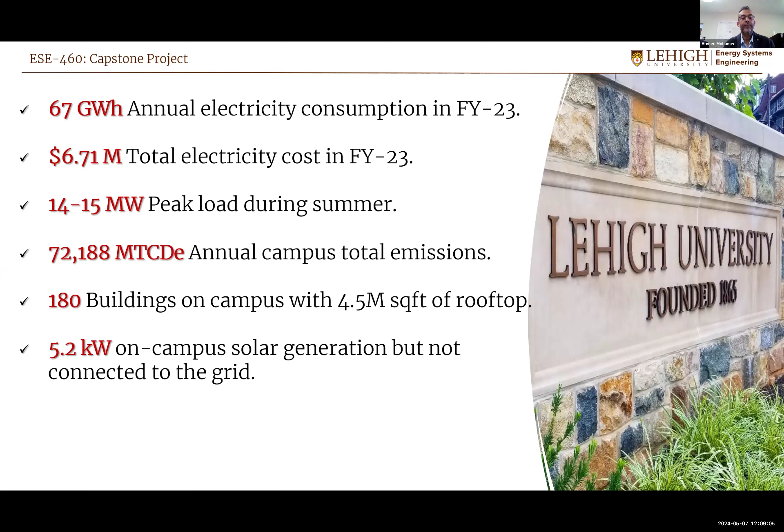The project objective is to assess the potential for the campus to provide grid services through aggregation of an intelligent virtual power plant, support the achievement of the financial, environmental, and operational targets, develop a detailed simulation for the integration of distributed energy resources, and present the findings derived from the exploration of the project.

Regarding the sustainability goals, the university has 13 goals for resilience and greenhouse gas emission. Our interest is in two goals. Goal number 11 is to offset 100% of the electricity consumption with renewable energy through a combination of off-site and on-site projects, energy conservation, and renewable energy credits.

Goal 12 is to seek additional renewable opportunities to offset natural gas usage as per climate strategy. Going into the potential, the university has a capacity to integrate distributed energy resources represented in rooftop solar and batteries to enhance its resiliency and reliability. This will lead to energy saving and, of course, greenhouse gas emission reduction by using these renewable resources. Ultimately, this will lead to financial impact through participation in the demand response program.

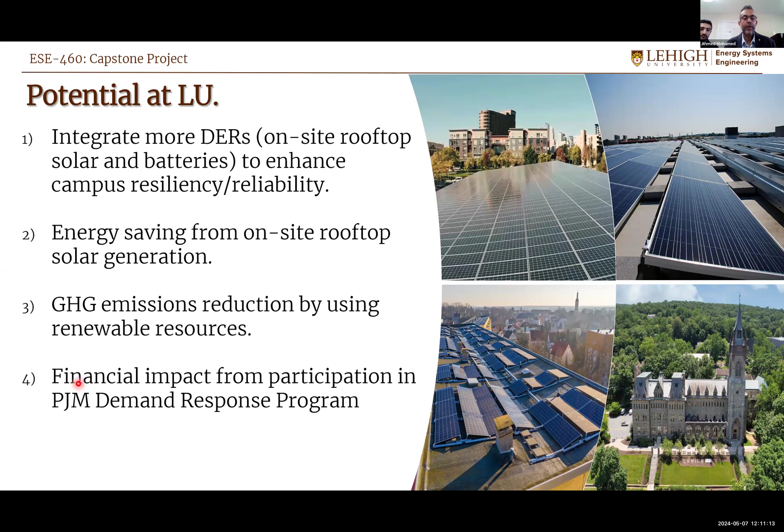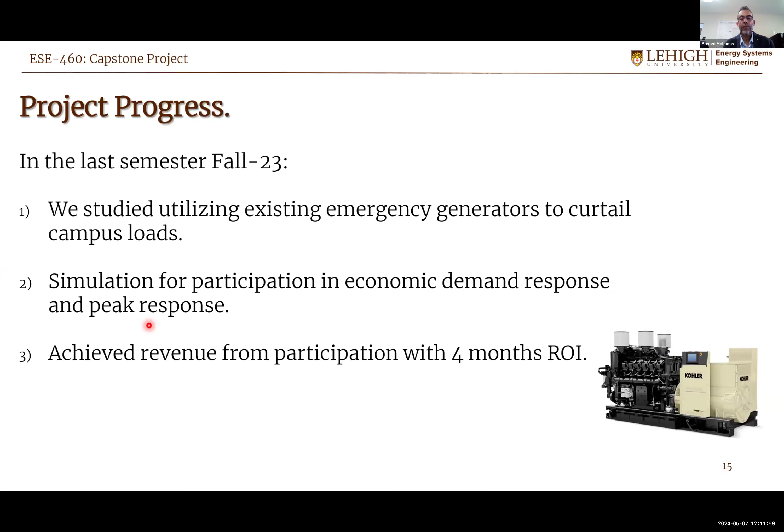Project progress. Last semester, fall 2023, we studied the existing emergency generators to curtail campus loads. We have done simulation for participation in the economic demand response program. We evaluated different tools of the demand response program, and we selected the most suitable tools for campus contribution, resulting in revenue with a 4-month return on investment.

In this semester, we have done background research based on the available assets at campus, as well as a review of the demand response program. Then we have done data collection and simulation through the load profiles for the buildings and analysis of the distributed energy resources via REopt and HelioScope, as well as developing a selection model through rating index metrics and the contribution from the DIRNet neural network model, which led to the simulation of the demand response program. Based on this, we made the assessment in terms of operational, financial, and environmental results.

A virtual power plant, in a brief definition, is an interconnected network of distributed energy resources, such as solar panels and batteries, managed centrally to optimize renewable energy utilization, grid stability, and participation in energy markets. As shown in the graph, the virtual power plant has inputs and outputs. Inputs come from different distributed energy resources, like batteries, solar panels, generators, demand response. The virtual power plant is like a brain to predict, optimize, and aggregate the best resource energy for selection, for evaluation, and to contribute in the demand response program.

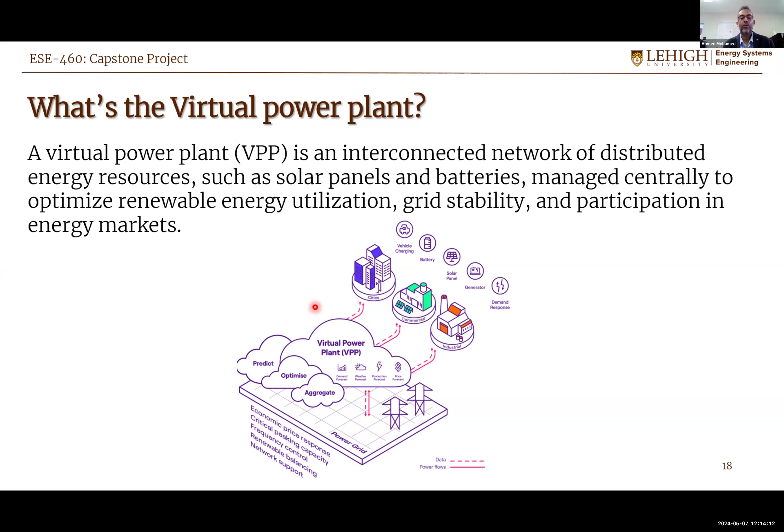Similar to our project, we have explored as part of our background research similar universities like the Queensland project and the University of California. University of Queensland has done a batteries project. The project rated power is 1.11 megawatt. The storage capacity of the batteries is 2.15 megawatt-hours. The total project cost was around 2 million and it was commissioned in 2019.

The project revenue for the first quarter was around $80,000. As shown here, the battery earns revenue by charging when energy prices are low and discharging when prices are high. The prices range from $11 up to $34. The battery is charged at low prices and then discharged to the grid when prices become high, around 34, which generates revenue for the campus.

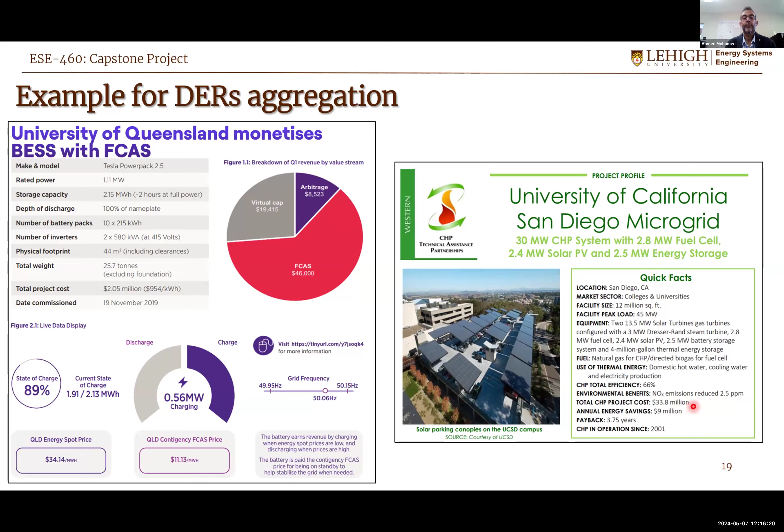Another example on the right-hand side is the University of California. California has implemented a 30 megawatt combined heat and power system with a 2.8 megawatt fuel cell. It consists of 2.4 megawatt solar panels and 2.5 megawatt energy storage. The payback for the project was around 4 years, and it was commissioned in 2001. For the technical discussion, my colleague will introduce this part.

Thank you, Ahmed, for providing this introduction about our Capstone project. As Ahmed mentioned, we are seeking to make a feasibility study for a virtual power plant at Lehigh University. In this part, I will start the technical discussion about our project. Our project passes through many steps. The first step of this project is the data collection and ingestion in the DERNetSoft software platform.

As shown here in the attached photos, we collected the Lehigh Shark meters, which are around 180 electricity meters for the buildings. This is done in cooperation with the Lehigh University facility team and Lehigh University Library and Technology Services. The data is automatically extracted from the Lehigh server to be added and integrated with the DERNetSoft software platform.

The second step in our project, we reviewed the existing buildings at Lehigh University, which are around 180 buildings, and we searched to find potential sites for installing rooftop solar. During this search, we looked for solar access for each building to ensure sunlight exposure without shading, besides reviewing the roof size and shape of each building to ensure that it's applicable for solar panel installations.

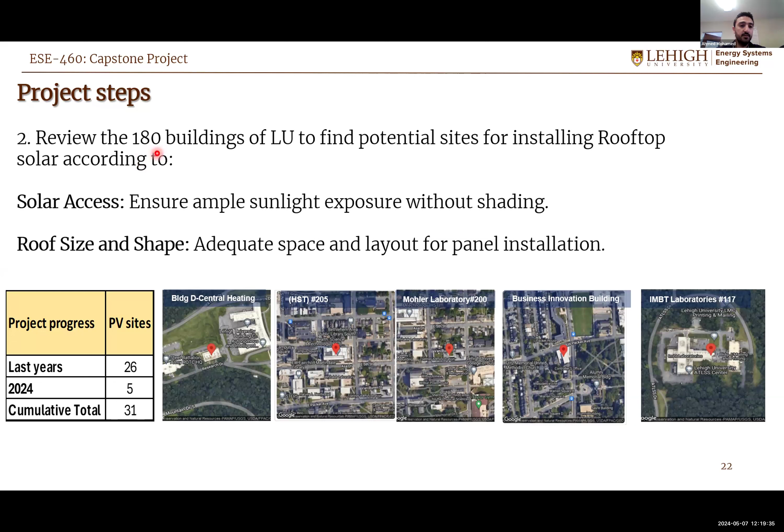After selecting the 31 buildings from 180 buildings at Lehigh University, we conducted a HelioScope simulation to find the solar panel capacity available for each building and the generated energy along the year according to the site location. HelioScope is an online software used to determine the solar panels required for each building, as shown in the photos here.

We conducted analysis for Mohler Lab, HST, business innovation, the central heating, and the IMBT laboratory. There is a lot of space available for rooftop solar installation, as shown in the IMBT laboratory and HST, which is a potential for energy generation on campus.

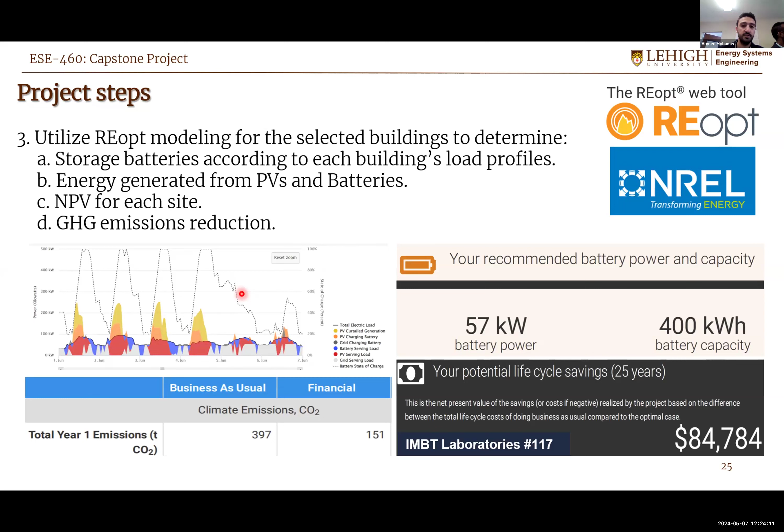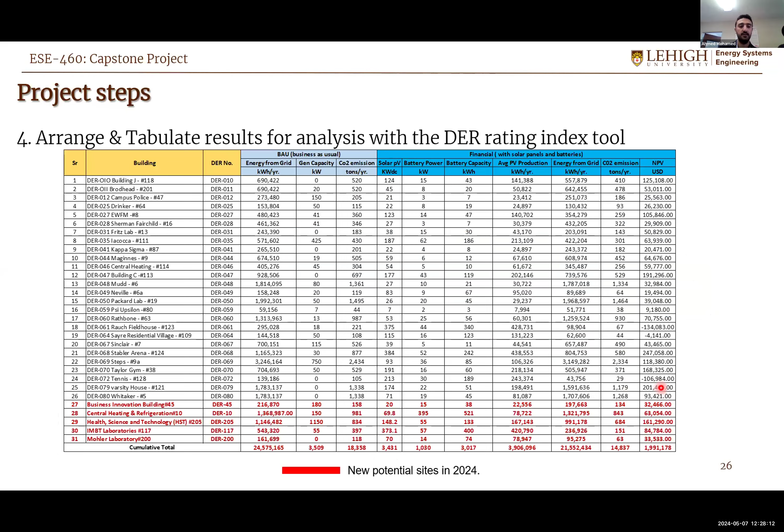And after listing all the distributed energy resources, we started ranking the distributed energy resources according to some criteria. As Ahmed mentioned before in the breakdown of the project, we did simulation for the distributed energy resources according to operational, environmental, and financial criteria to determine the best distributed energy resources for installation, and to determine if it's feasible to participate with these distributed energy resources or not.

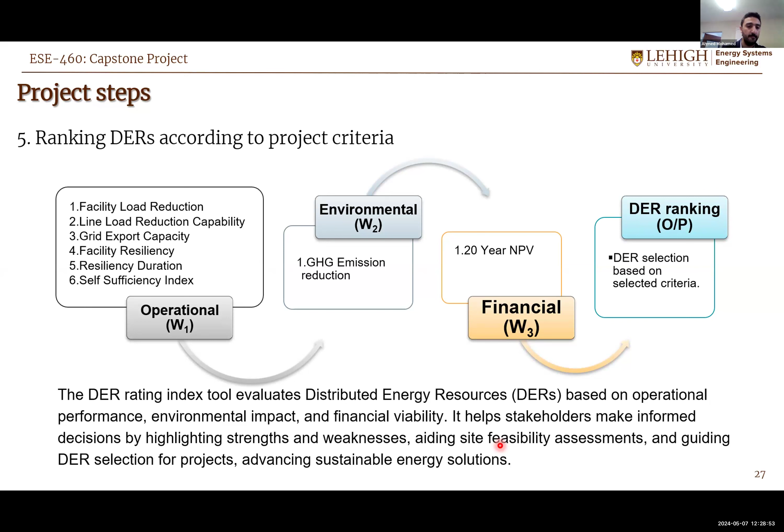For the operational side, we have 6 criteria. For the environmental side, we have 1 criterion only. For the financial side, we also have 1 criterion. By applying this tool, we can select the best distributed energy resources on campus. For operational, I will go quickly through the criteria.

The first one reflects the ability of the distributed energy resources to decrease the energy consumption of the facility. The second one looks at reducing the peak demand of the building. It's looking at the peak demand, not the energy. The third one looks at the grid exporting capacity. It shows the ability of distributed energy resources to sell power to the grid.

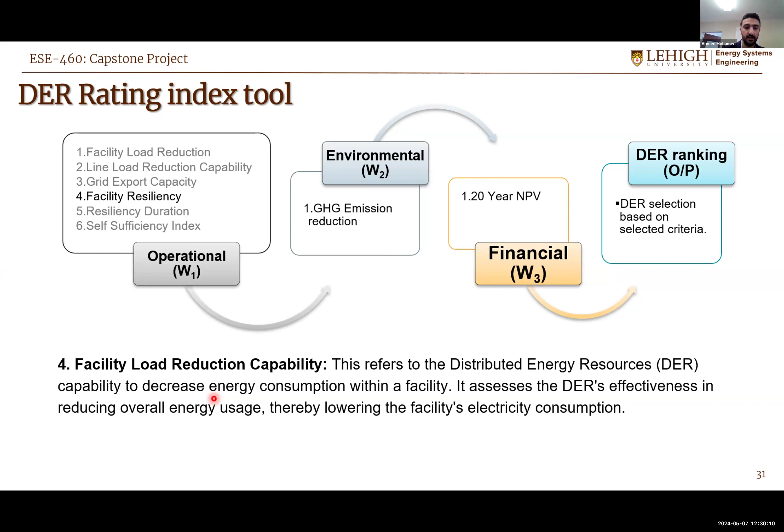And the fourth one looks at the resiliency of the building according to the battery installed and the solar panels installed: how much the building can depend on its own generation without the grid operation. So for resiliency, they also look at how many hours the facility could depend on its own generation during a power outage.

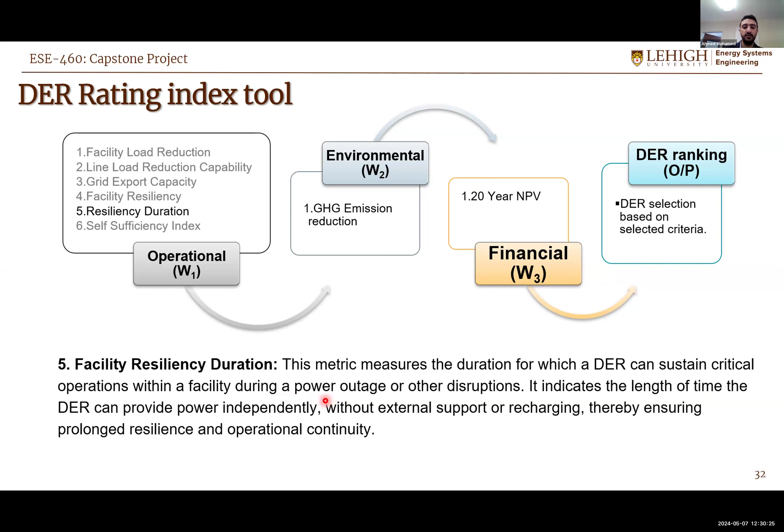For the self-sufficiency index evaluation, it evaluates the capacity to generate sufficient energy to meet a significant portion. If you have a significant target to be achieved, it will be reflected by the self-sufficiency index. For our project, we selected some of these criteria according to the project target, as Ahmed mentioned before.

Sorry. We are targeting participation in the demand response program. This is the first target. The second target, we are looking at the environmental goals of Lehigh University to reduce greenhouse gas emissions. And of course, any project should have a positive financial impact. So we selected 40% for operational criteria, 30% for environmental, and 30% for financial.

And from the operational subgroups, we selected the line load reduction at 100%, because in our project we are looking for participation in the demand response program, which means peak demand reduction during the peak periods. And after using the DER rating index tool, we are now able to get the top 20 distributed energy resources rated according to these criteria.

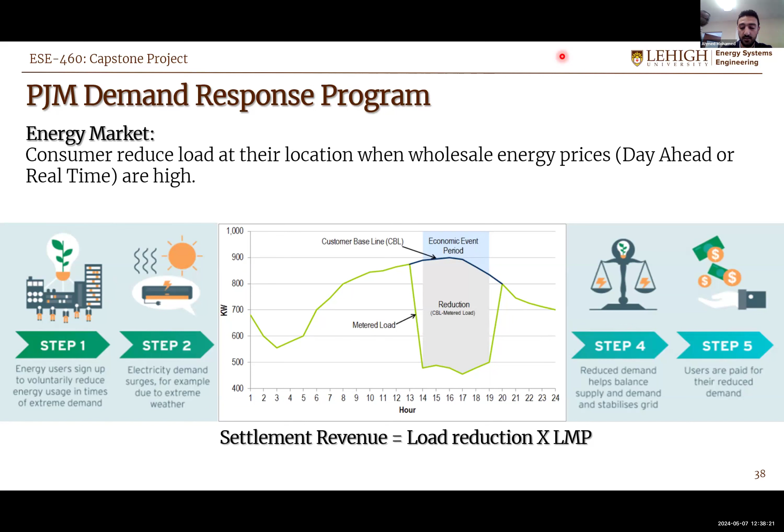According to these steps, you can firstly sign up for the demand response program. You should track the electricity and demand surge, and you should participate in case there is extreme weather, which is reflected in the energy prices. The middle part is showing that during the event, the consumer should reduce the load to gain money as a payback from this participation. Along our project, we did simulation for both programs, the capacity market and the energy market, as will be shown in the next slide.

And for the demand response, we simulated two scenarios, the economic demand response and the peak demand response. The first scenario is to curtail 1 megawatt hour from the peak demand of Lehigh University. The second one is to curtail 1.5 megawatt. As Ahmed mentioned in the first slide, Lehigh University peak demand is around 14 to 15 megawatt hour during the hot summer period. For the economic demand response, we simulated 162 hours per year. And we found during the last year, the prices are going up in these 162 hours.

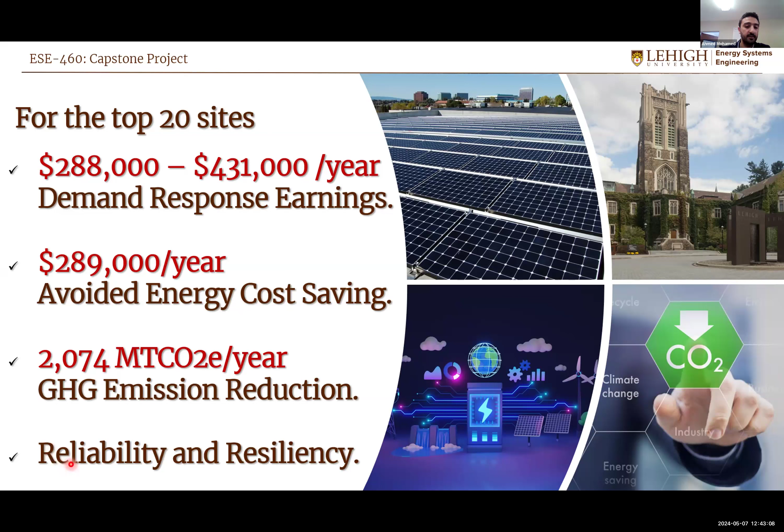For the future plan of this project, we are looking for a viability study to assess more technical and financial and environmental feasibility to determine the capex required for this project and the return on investment to give the stakeholders input to finance this project to be implemented at the Lehigh University.

And this is our link resources. Thank you all. And this is the time for questions if anyone has any question. Thank you.

Okay. Let's see. Yeah. Questions for Mohammed and Ahmed? I guess I could start with one. Okay. Are you able to hear me? Yes. Okay, excellent. So great presentation.

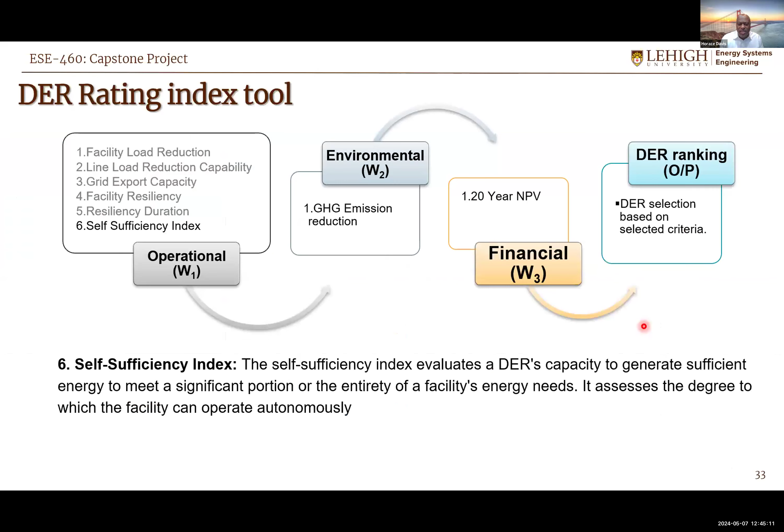One of the things that sticks out is the diagram that you showed of many of the buildings with solar panels on them. They seem to be flat roofs and pretty significant. And as you provided the financial analysis, I don't know that I got a really good sense of the cost for the panels, and if these panels are going to be placed on the roof. Is there structural considerations that you have taken into account and included those costs if you were to place these panels? Because it's looking like a lot of panels.

I'm thinking, quite a bit of weight. I don't know what the structural supports are for the roof. And are they able to just accommodate all of the panels that you've indicated they would go on?

Yes, good question. We discussed this point with the Lehigh University facility, and this is our future plan to determine the actual capital cost required for this installation on site to have a solid ground for this project. We only determine how much capacity could be generated from each building, but it needs more analysis for the building roof, if it's applicable for installing the solar, what is the modifications required for the roof, if it needs some structure or something like this. This is the future plan for the project.

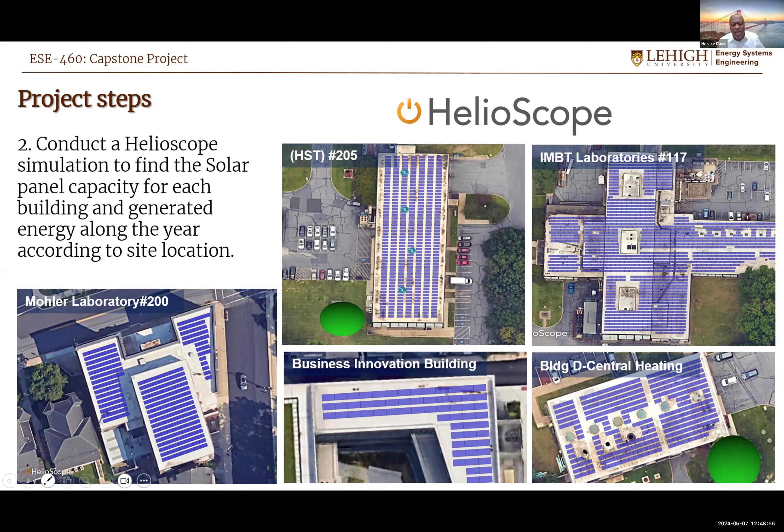Yes, of course, that's what we mentioned in the future plan, we are looking for more analysis for the project to determine the actual capex required for installation.

All right, thank you. This is Revis. I did share Boris's questions about cost, so I appreciate that discussion. Good presentation. I just have a kind of a different question.

Although you didn't look at cost in depth at this stage, you did look at potential for the value of different installations. My question is, where was the highest sensitivity in your analysis? For example, assumptions were made about how many events in terms of energy reduction and demand reduction would be needed, and then based on that, calculations were done of savings in terms of energy and so on. Is that the most sensitive variable affecting the results of your analysis, or are there other variables that were particularly sensitive to driving the outcomes?

So according to the distributed energy resources rating index tool, as I mentioned before, there is a weighted average you should put for this tool to determine the top sites available for the energy. According to this weight, we put 40%, 30%, 30%. According to this weighted average, you can select the best distributed energy resources on site. The most sensitive one is the operational. If you increase the percentage of the operational, it will be most sensitive. If you increase the environmental weight, it will be most sensitive. Did you get my point?

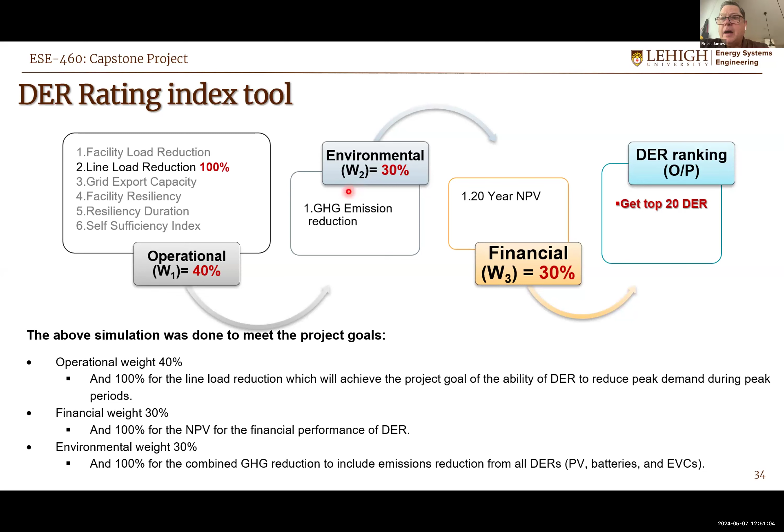I think maybe we're talking on the same plane. I think maybe another way of phrasing my question would be, if, for example, the number of event hours in your assumptions were to decrease by 10%, how radically would that affect the energy, the total costs, the net present value of the total cost benefits? If it were only to change by 10%, would it go downward by 10%? Is it proportional? Is it a nonlinear relationship?

Let me explain my motivation. I think in terms of this project, in terms of creating an insight and approach to how to do this for other facilities and institutions, the research will help define a systematic way to approach this. I think understanding that sensitivity is important. So if assumptions about those events are the key thing, or for example, the markets which establish prices for reduced energy or reduced demand, obviously those curves have a lot of volatility in them. If that volatility changes in a small way, will that have a very radical effect on the results, or is it a fairly proportional relationship? That's the general question I have.

Oh, can I speak? Yeah. Okay. Hey, Revis, let me interject. They didn't do a sensitivity analysis, but I think your comment is very appropriate. Which of the parameters could most affect your cost benefits and so on. I think this wasn't done though during this project.

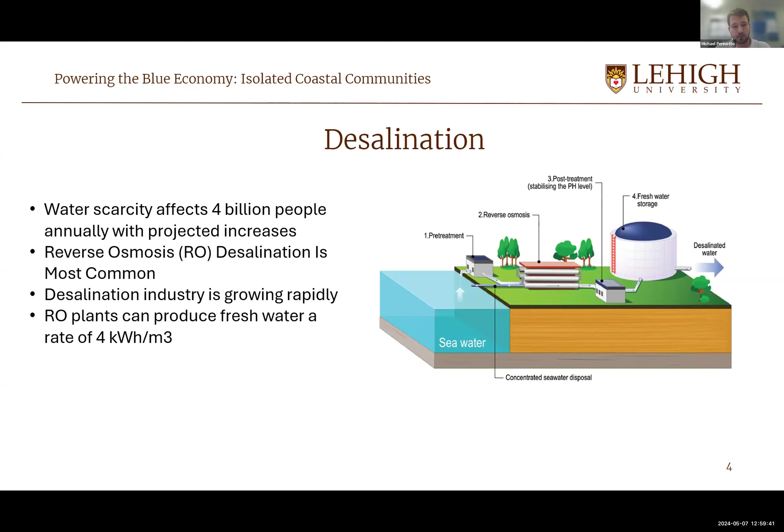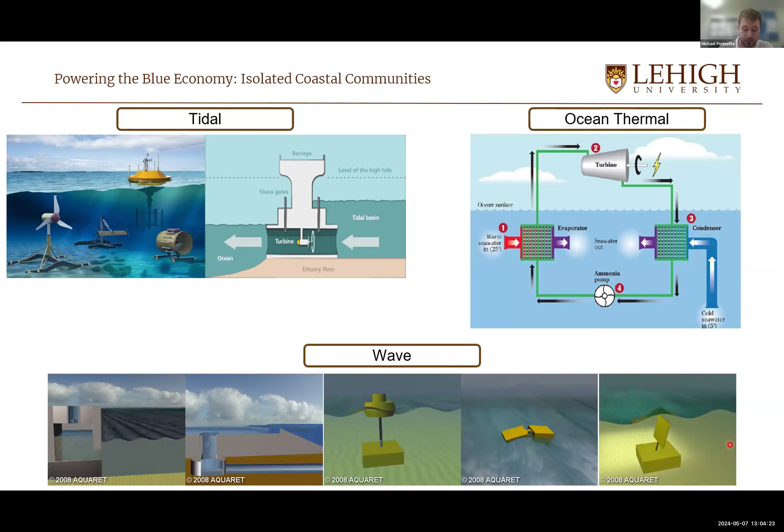And included with marine energy, I also wanted to explore offshore wind energy since it's located in the same region where we would be able to find the marine energy resources. Over the past decade, offshore wind has been getting more attention due to higher, more consistent wind speeds offshore. In addition to that, turbines are also able to be constructed much larger offshore, increasing their rated capacities.

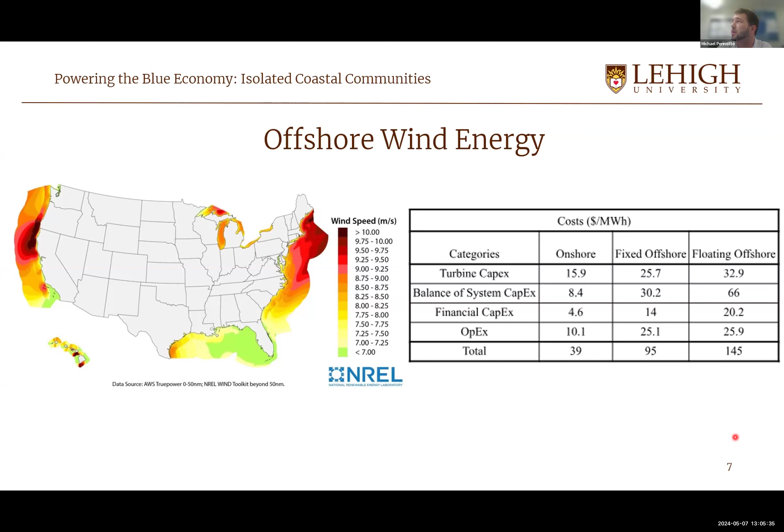Now, specifically, the two energy sources I wanted to explore were wave and wind resources because they are complementary. Since the wave heights are dependent on wind speed, as the wind speed is higher, it's able to deposit more energy along the ocean surface, thus increasing the wave heights and increasing the wave energy density potential.

All right, so now that we know the problem and a little bit about a possible solution, I'll talk about how I modeled my microgrid. So this microgrid is set up to provide power to a desalination plant, 2 pumps, and 40 4-person households. This microgrid will be located in Cape May, New Jersey, since Lehigh is working with the Atlantic Marine Energy Center on the Powering the Blue Economy initiative.

So focusing on the energy system, as I just mentioned, the 2 renewable resources that were selected were wave and offshore wind. And to model how this system would work in an isolated setting, a backup diesel generator was used over a grid interconnection. In addition to the backup generator, an energy storage system was put in place with an unspecified capacity to see how the storage system would need to be sized for isolated grids with different contingency plans.

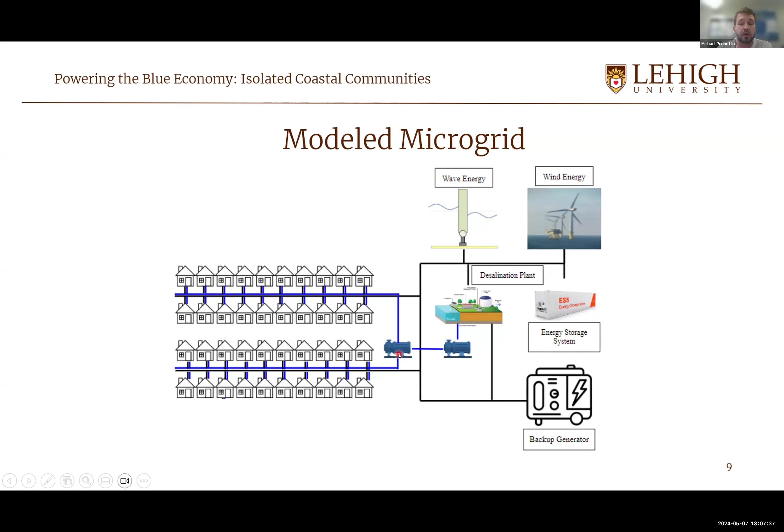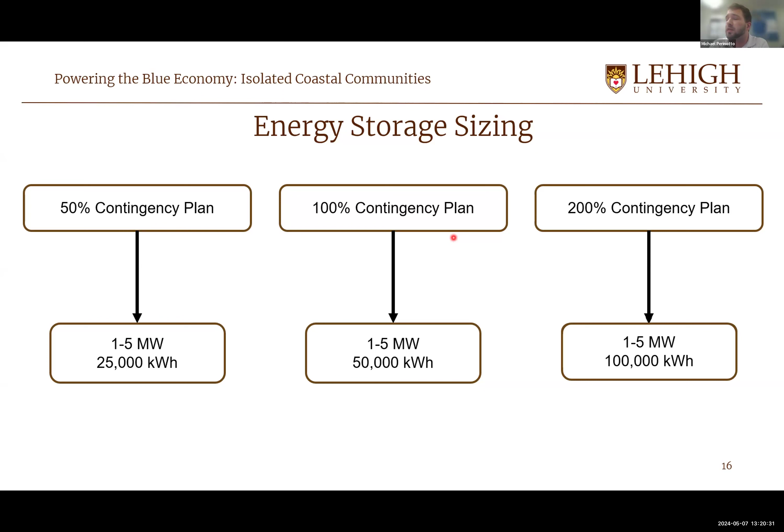Now, the rated power of these batteries can vary widely based on the community needs as well. If you would want the energy storage system to provide half the load throughout the day, you would want it to be rated at around 1 to 2.5 megawatt hours. However, if you want it to be more reliable, more dependent on the renewable resources, you would want this rated at 5 megawatts to help meet the evening peak demand.

But what types of energy storage can we use for isolated microgrids? Well, if you're looking at an island community where there may not be a lot of space to develop a large-scale energy system, battery storage may be the way to go. But if we're looking at the Alaskan communities where there's a lot more land to work with, we can maybe develop a pumped hydro storage system. And this would be really useful for these communities, since if you have a long period of high generation and then a long period of low generation, you're able to store a large amount of power that can be discharged whenever you need it.

However, this pumped hydro system would probably not fare as well for the northern Alaskan communities at the higher latitudes and around the Arctic, because pumped hydro does not work well when the water is frozen. So we might be wanting to look into a compressed air storage system. And this has another benefit for the northern communities, because when you compress the air, you also generate a lot of waste heat, which can be used to go into heating all the residential or other buildings throughout the community, which would decrease the overall electric demand.

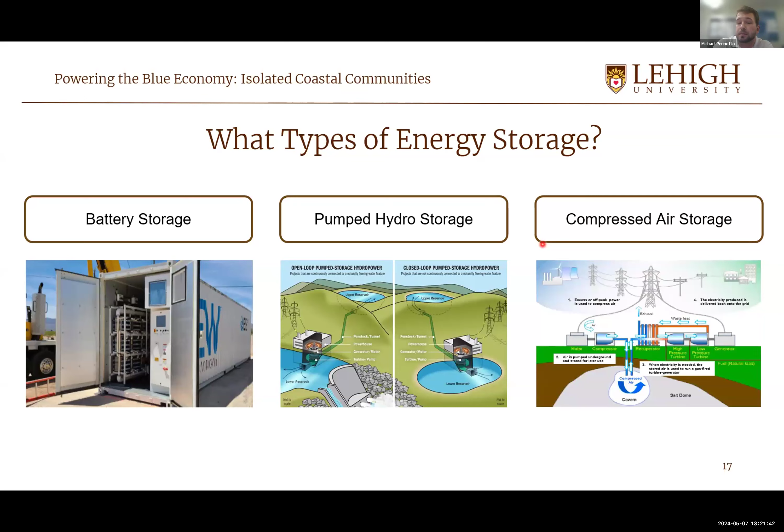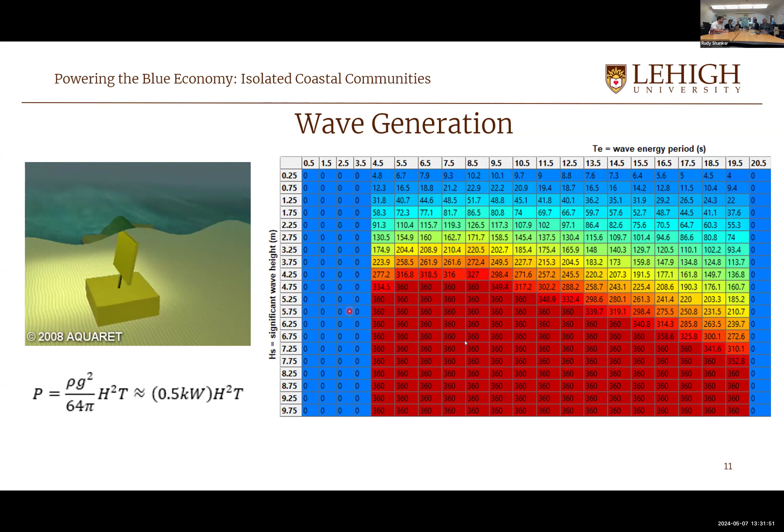Thank you very much. All right, there are no more questions. We'll have Alex make his presentation. Enable screen sharing. All right. Rudy, doesn't Alex need to be a co-host? I don't have that ability to make him a co-host. You have to do it. You can go to the corner where your camera is, and then go to the dots. Oh. All right, sweet. Okay, I just fixed it. I reclaimed the host and I added Alex as a co-host. So you should be able to share the screen now. Thank you.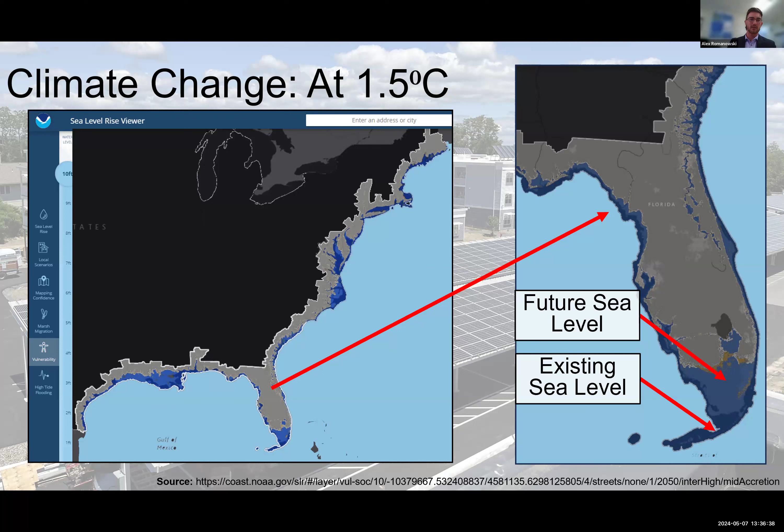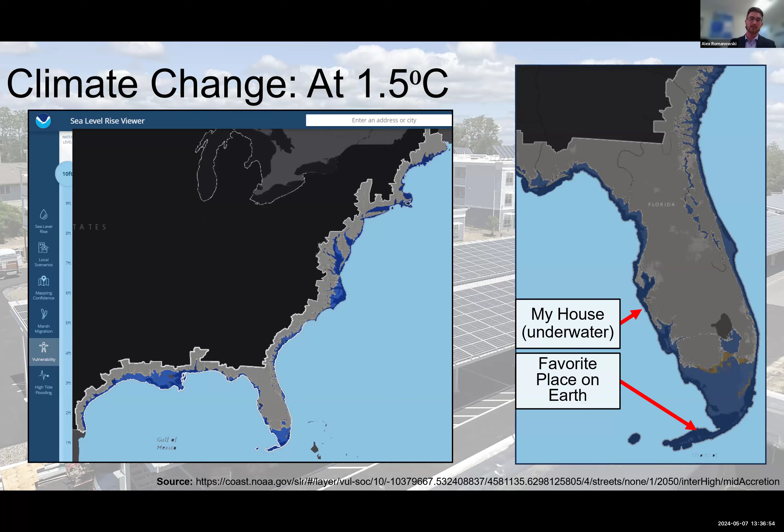Part of the big driver behind my desire for helping out with the climate crisis is that's where I live. It may be underwater in the future. And then my favorite place on earth, Florida Keys, will also be underwater. Fortunately, I like to scuba dive. Unfortunately, I'd like to visit my house without a mask and snorkel on.

But I grew up hunting, fishing, pretty much anything outdoors, camping, you name it. And I've been reading all these projections about just devastating climate impact to nature, our wildlife, speciation. And I want to watch my kids and my grandkids grow up and enjoy nature as much as I have. So that's my big driver behind trying to enter the sustainability space.

And we're running out of time to be able to actually turn the ship around. So on the left, you'll see a graph from the IPCC giving us our budget until we surpass 1.5 degrees C and 2 degrees C. And it looks like we've only got until 2026. So it's more than likely that we're going to surpass both 1.5 and 2 degrees C.

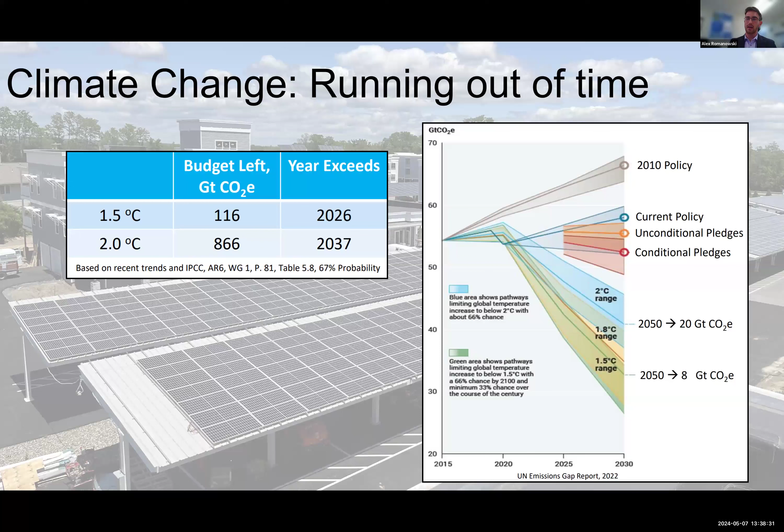Now, on the right, you'll see a UN emissions gap report of 2022, highlighting how policy is going to be able to impact the amount of carbon that we're emitting and what we're going to need to do to stay within the bounds that we've set. And it looks like we need to make a lot of change.

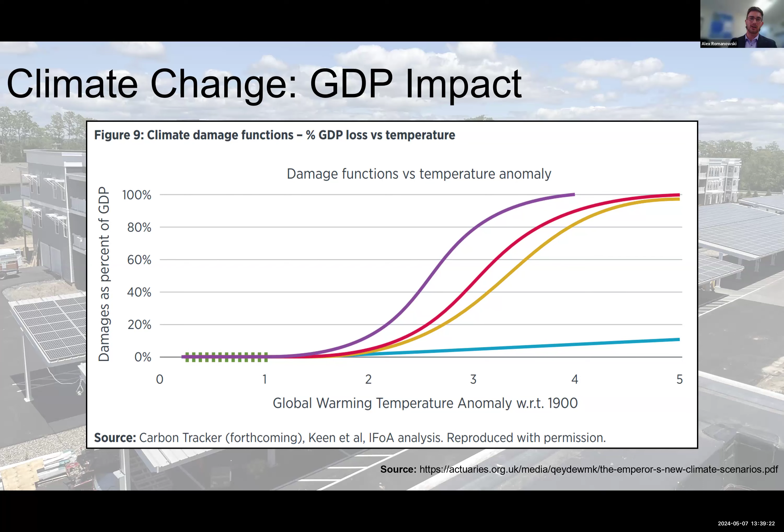So what happens if we miss? Well, there's all sorts of analysis with ranging levels of impact, but this one in particular took natural disasters as a function of GDP loss and then scaled it logarithmically along with global warming temperatures. And we can see that as the planet gets hotter, we're likely to see more devastating natural disasters that are going to impact our GDP. Now, the accuracy of any of these forecasts, I don't know. I'd rather just not roll the dice. So what can we do now to help avoid that situation?

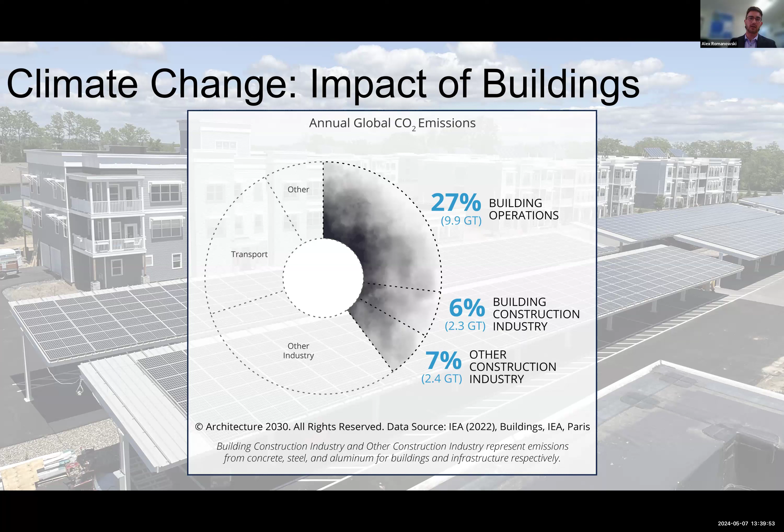Well, this carbon emissions data is taken from the IEA in 2022, and we can see that building operations contribute to 27% of annual CO2 emissions, and the construction industry and other construction also significantly contributes to CO2 emissions. So if we start building clean, we can reduce our carbon emissions. And that's why I'm a big proponent of building net zero, which is when your annual energy consumption is equal to your energy production. And there are a lot of benefits surrounding net zero.

I'm going to spend a lot of time focusing on the financial aspect in this presentation, but I want to spend a little bit of time to highlight just how comfortable these buildings are, because they've got airtight envelopes, and they're very thermally well insulated and sealed. They're super resilient. If you're going to have power outages, a lot of these buildings have passive heating and cooling fixtures built into them. Obviously, they're eco-friendly because they see a significant amount of energy savings.

And they're better for the grid. These buildings have a lot of building management systems, and they can really tailor their energy usage around when their energy consumption is, and what the grid's needs are. That's a little bit further down in the future. But focusing in on the purpose for this project: first semester, I wanted to understand the financial and technical challenges of net zero building. And this semester, I worked to identify the most viable states for net zero development outside of New York.

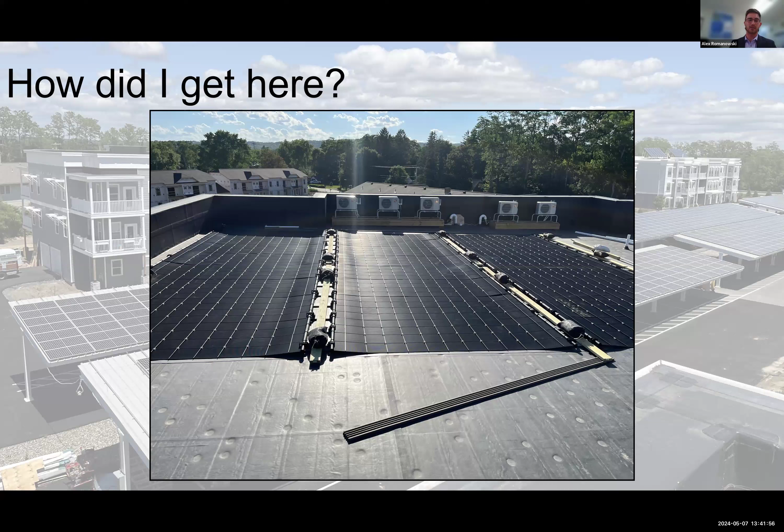Quick Google search, looking for work over the summer, and a couple of phone calls later, I ended up on this roof doing some solar thermal installations, and I just thought the project was awesome for both Solara and net zero as a whole. These are some of New York's first market rate multifamily net zero apartment complexes.

And I had been studying this stuff for a while, and it was just all the technology that I'd been reading and listening to and watching, all in one. And it was actually financially viable, which is really exciting to me. So naturally, I had three questions when I started working at Solara. First of which was, how are these projects all market rate, net zero, yet still financially viable?

Because that's something that I'd been told time and time again: super high efficiency building just isn't quite there yet. We need the cost to come down. And why isn't this done everywhere? I spent a lot of time last semester talking to folks in industry and trying to understand some of the bigger issues with these projects. And then this semester, if it doesn't work everywhere, where does it work?

Now we go into some of the basic technical elements of net zero building. The first semester's presentation goes a lot more in depth, especially into Solara specifically. Let's just do a quick review. So the first is the envelope. You want to make sure that your envelope is airtight. That way you're not losing any air to the outside, and there's no infiltration inside.

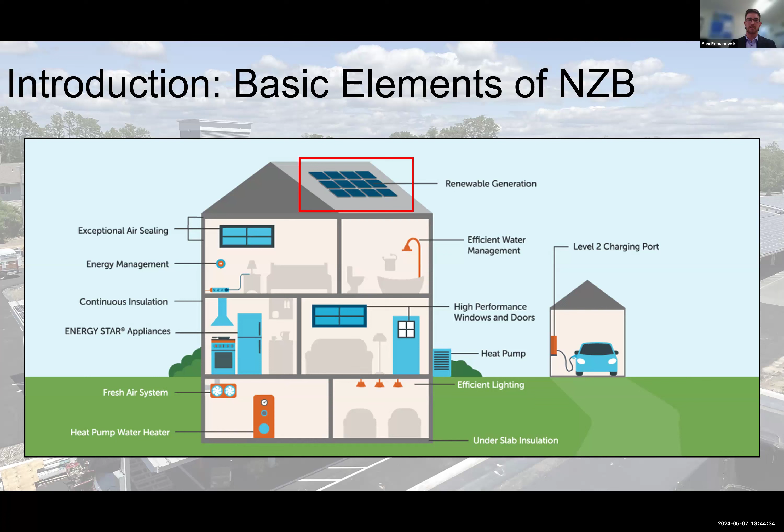And now that you've got such a thermally insulated building, you can really downsize a lot of your heating and cooling elements, and add in high efficiency appliances as well. This will decrease the building load. On top of that, you pair that with an energy management system that's going to fine tune all of your systems to make sure they're working at the highest efficiency possible. And then you throw renewable generation on top of that, and it'll really offset your building consumption.

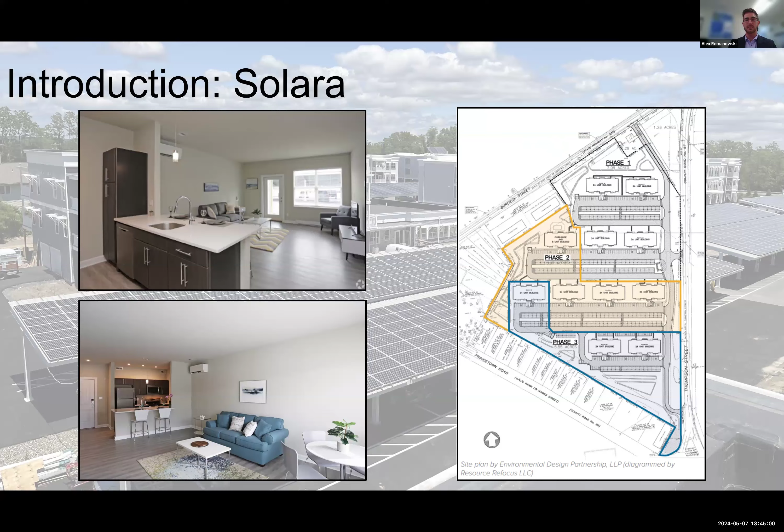A little bit more about Solara. This project was 11 buildings, 248 units, a 3-story multifamily luxury apartment complex. They've got an elevator, a lot of very nice amenities, and higher finishes. And other than being net zero, what's unique about Solara is the way that they ran their financial structure.

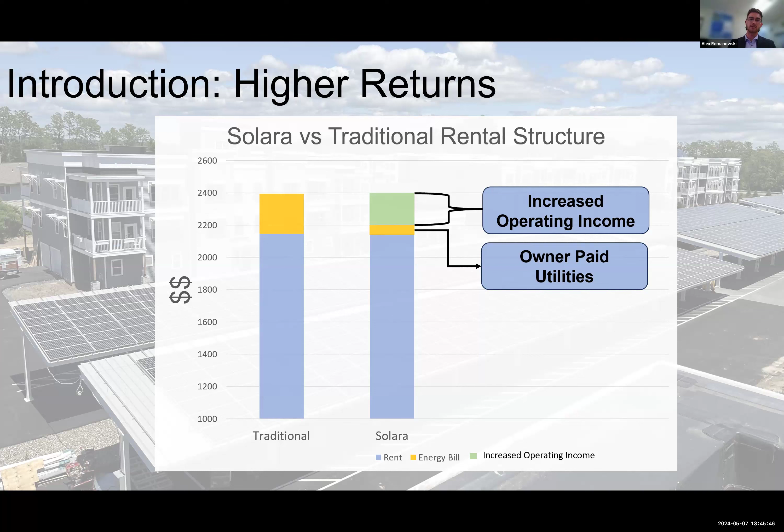On the left of this graph, you'll see a traditional apartment complex, and on the right is Solara. With the traditional apartment complex, your landlord is just charging for rent. With Solara, you've got rent, utilities, cable, Wi-Fi, and a ton of other amenities all bundled into one fee. The reason they do this is to recoup their energy efficiency improvements. The owner's paying significantly less in utilities than the market rate, so they're able to capture some increased operating income. This will help cover the increased capital for the green investment.

Now looking into Solara's financials, the monthly utility fee less the residual bill gives you their monthly and annual NOI from that utility fee. Evaluating that at a 5.5% cap rate, you're left with a utility disposition value of almost $34,000. Compare this to the green cost, and you're about equal. And this is for phase 3. We'll get into why that was a little bit more expensive later.

But then looking at your net disposition value, upstate New York had a ton of incentives. This is on a per unit basis. So the increased value of building green for phase 3 of this project was $21,000.

Now that we understand a little more of the technical and financial aspects behind net zero building in upstate New York, it's time to apply that to the rest of the country. The first step in that is going to be state selection. So how do we know which states to look at? The first thing we're going to do is break the country up by climate zone.

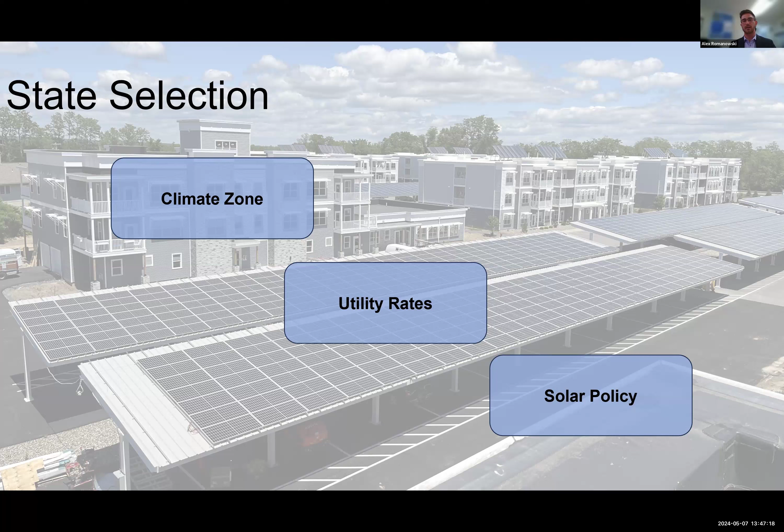And then we're going to look at the states with the highest utility rates in each of those climate zones, and then cross-check the solar policy to ensure that it's going to be friendly towards net zero development. Starting with the climate zone, the country is broken up into all of these different zones. The first one that I examined was 3A down south, and then the rest were 4A, the 4s, 5s, and 6s. The reason why I left out some of the very humid or very cold climates is because those are just going to be more extreme, and the modeling that I was using is a little bit more limited for dehumidification and some other things.

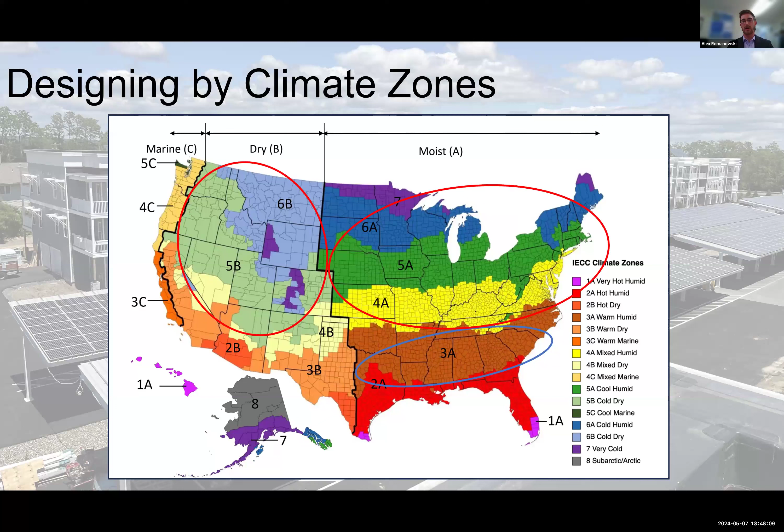Now, the design elements are relatively similar for the climates circled in red compared to that in blue. And some of the differences between zone 3 and zones 4 through 6 are around the insulation. As you get colder winters, you need significantly more insulation. Your heat pump efficiencies are going to degrade in the colder climates.

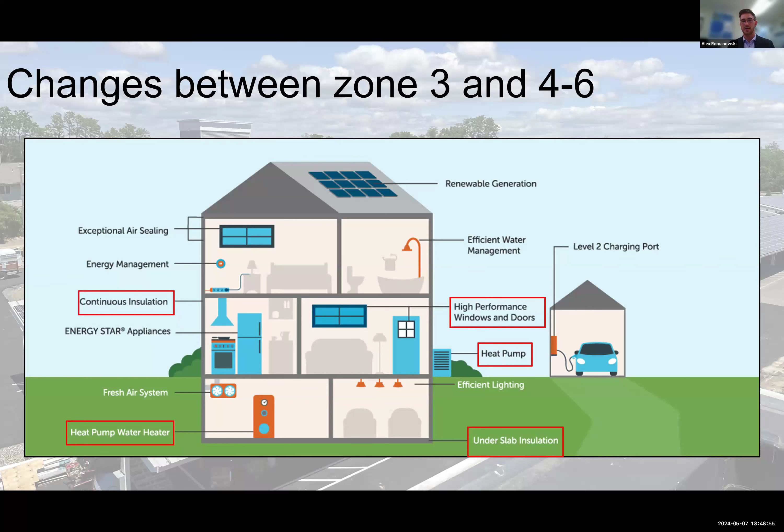And you also need to change your performance standards of your windows and doors to allow for more solar gain in the north, where you want your windows to be more tinted down south to prevent that solar heat from entering the home, because you're in a predominantly heat intensive environment. And finally, your under the slab insulation is going to change a little bit based on what climate you're in.

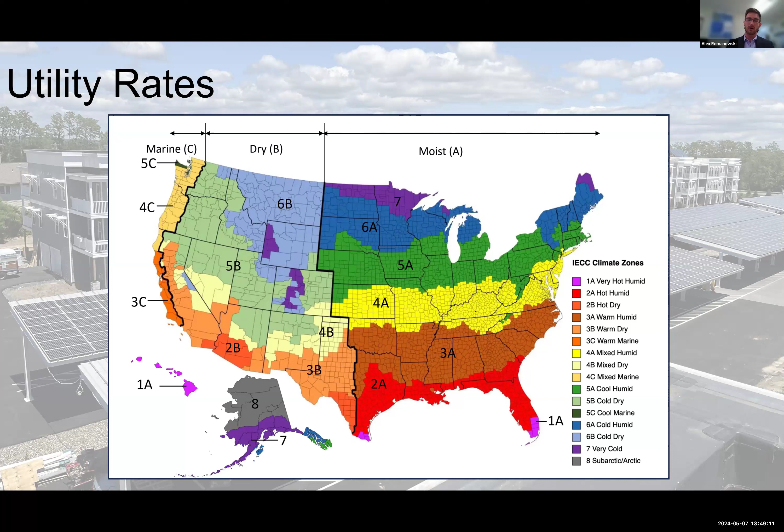Now, looking at the utility rates, I got average utility bills from Forbes all across the states. And these are the states in each climate zone that had the highest utility bill. If you're bad at geography like me, those are Georgia, Nevada, Wyoming, Kentucky, Maine, and Connecticut.

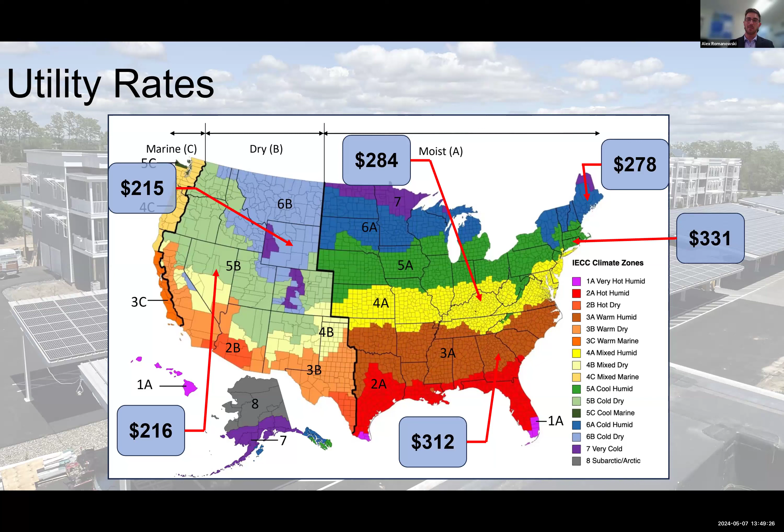Now, I cross-checked with the solar policies, and Kentucky and Georgia were actually not going to be favorable. So I had to switch to Arizona, Arkansas and Maryland. And you can see, between Georgia and Arkansas, that's a pretty significant difference in the monthly value of the utility bill. So as we're trying to chase down this value of the utility bill, it gets a whole lot harder to make these projects pencil when that monthly value goes lower.

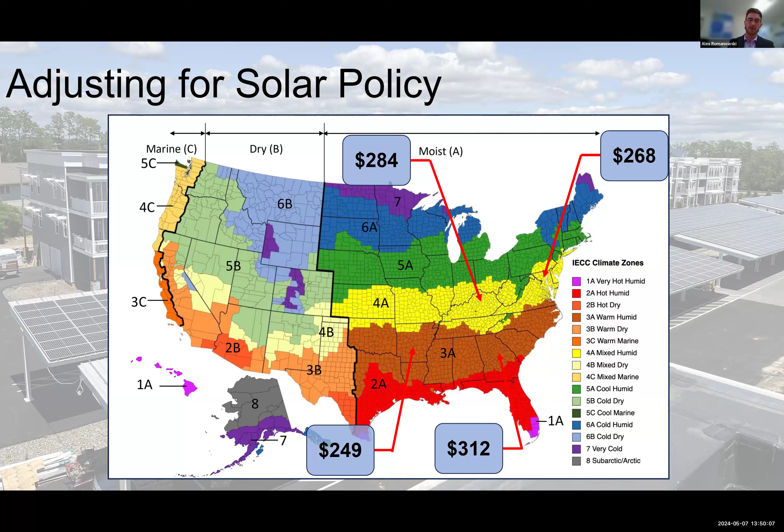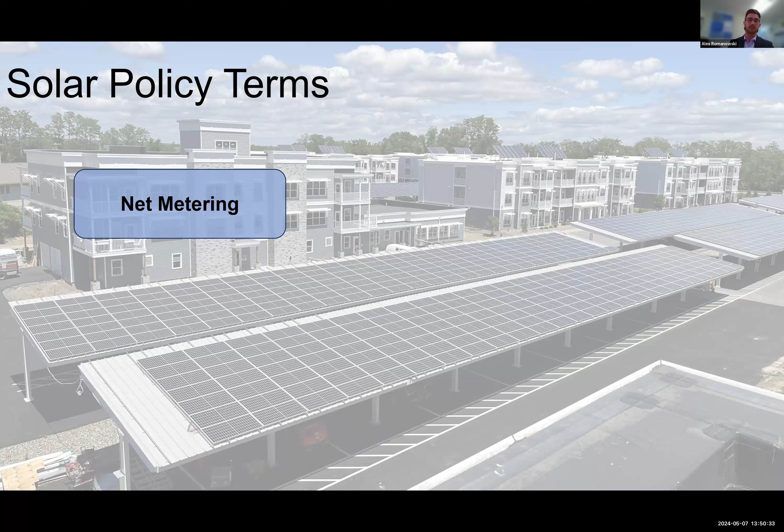Now, I'm going to get into a little bit more of how solar policy varies by state, but first I'm going to lead you on with a few key terms. Net metering is the balance between energy production and energy consumption over a period of time. A lot of states vary based on the time frames in which they include net metering. And then states also vary based on your net excess generation. So this is when you're producing more than you consume in your metered period.

And most of the states at this point are going to be reimbursing you at the avoided cost of energy, which is different than the retail rate. The retail rate is the dollar per kilowatt hour figure that you're going to see on your utility bill, where the avoided cost is what the utility is paying for that energy. So it's going to be a fraction of the retail rate.

And the final term are SRECs, or solar renewable energy credits. And these SRECs can be sold in some states on a market. They are generated per every megawatt hour of energy produced. And then companies will buy these to offset their carbon emissions. And essentially, it's just a way for the government to incentivize the renewable industry. And it definitely helps out the financials.

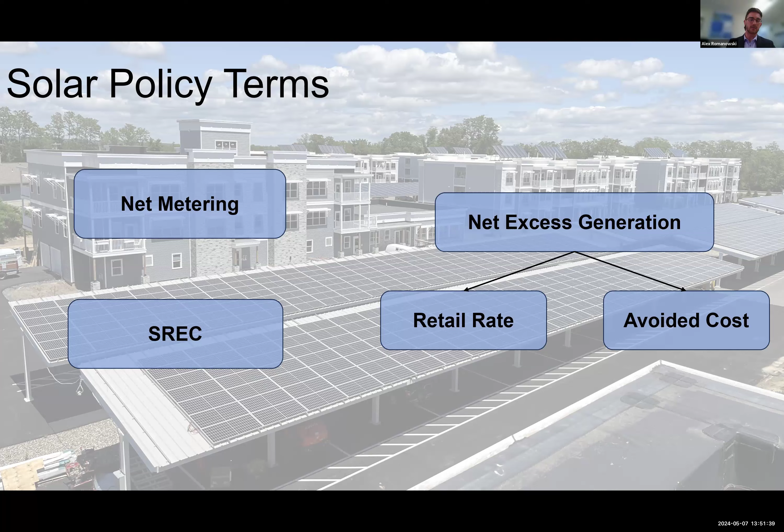So now that we've got those terms under our belt, we're going to look at the different types of net metering policies. The first of which is annual reconciliation. So typically when you think of net metering, this is going to be what most people are used to. And this is the annual consumption versus production. So in orange and yellow, we'll see the production of the building relative to its energy consumption over the course of the year. If they equal out, your kilowatt hour charge for that building is going to be 0.

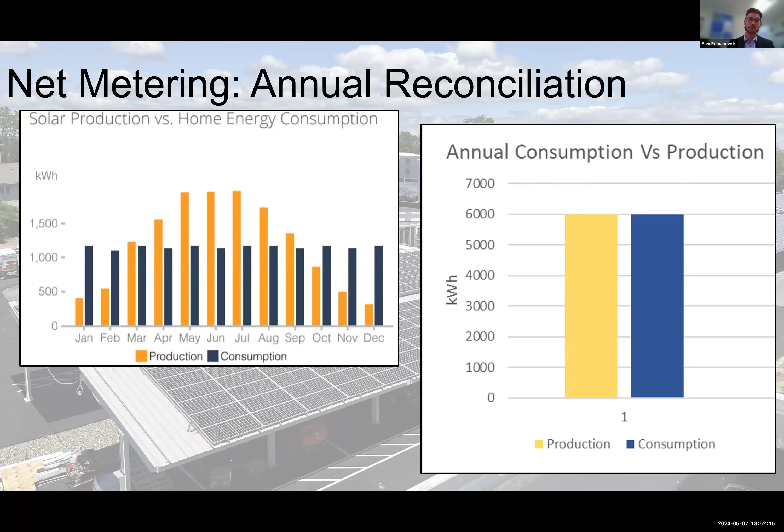Next is going to be your monthly reconciliation. So instead of summing everything up annually, you just do it per month. In the summer months, you'd be expected to have net excess generation, which is going to be reimbursed at the avoided cost of electricity. So, that much lower value relative to your winter months, where you're not going to be producing as much. So you're going to be paying that full retail rate. This really harms the economics of a solar project just because of the seasonal variation in production.

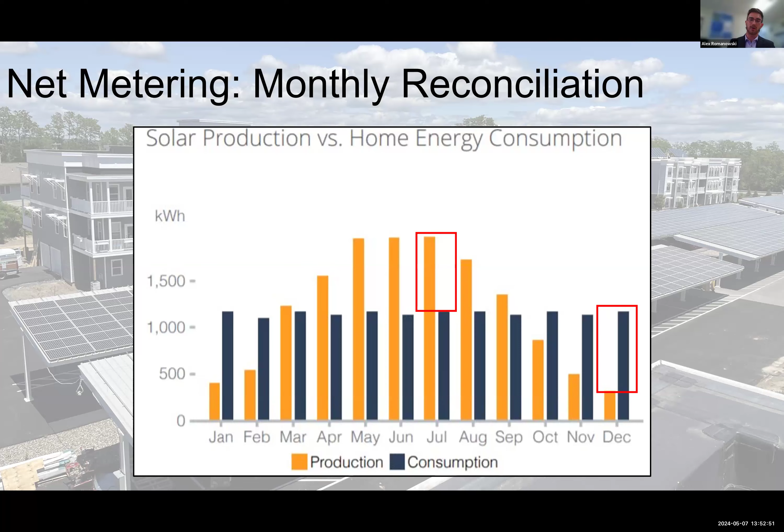The next, which is more stringent, is time of use reconciliation. So on this chart, you can see the solar generation curve in red and the load curve of the building in blue. Obviously, solar is peaking in the middle of the day, and the load curve doesn't always follow that.

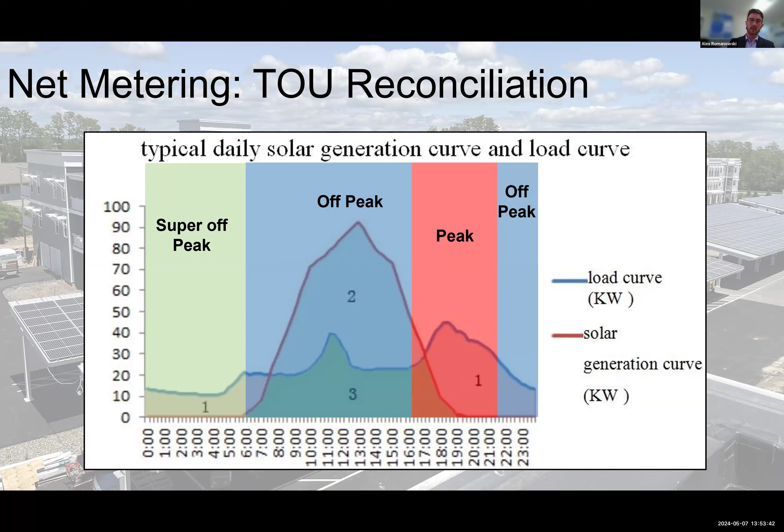So utilities chunk up these times of days into various rate categories. So in the early morning, your super off-peak is going to be your cheapest electricity. And then when your solar's high, and in the late evening will be your normal off-peak. And then right when everyone's getting home from work is going to be your peak pricing.

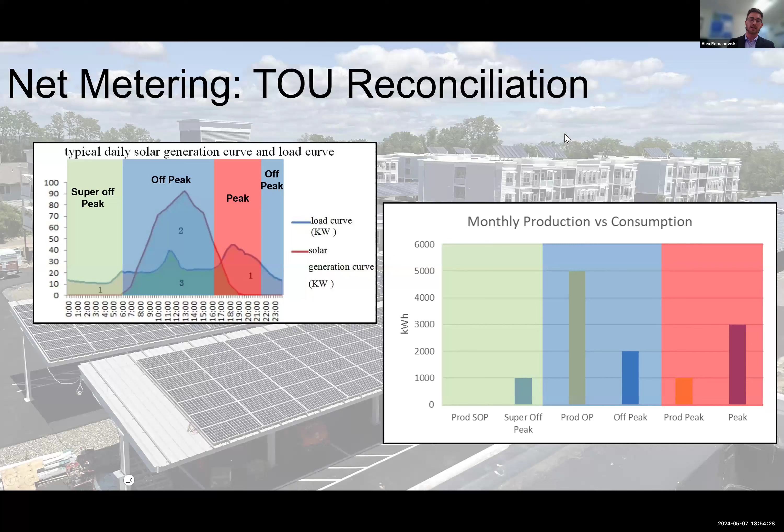Now, how this works is they take those different chunks and then they net meter over the course of a month. So what you would have is in your super off-peak, you're not producing any solar, but you're also not going to be consuming that much. During your off-peak, you will probably have net excess generation, which will be, again, compensated at the avoided cost. And then during your peak hours, you're going to be paying the retail rate. So there's some things that you can do to shift your building consumption towards when your solar production is. But again, this is just a lot harder to pencil than traditional net metering.

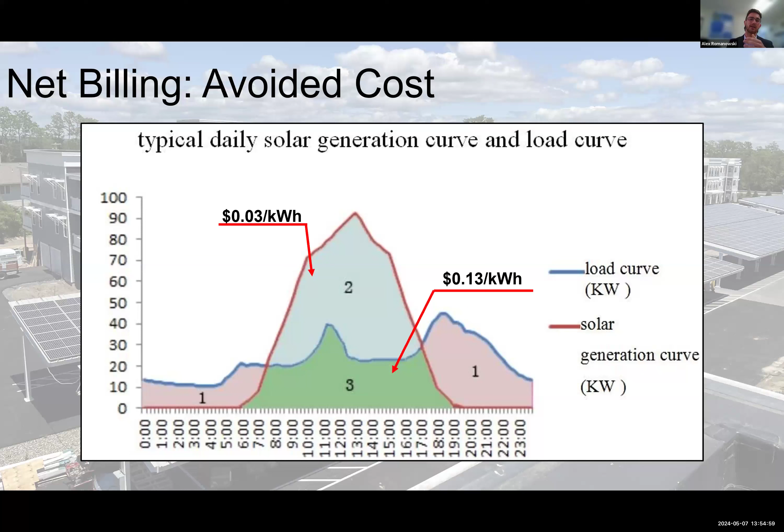And then the least solar friendly would be net billing. This is when anytime you're sending electrons into the grid instead of consuming them, you're immediately compensated at the avoided cost of energy. So 3 cents a kilowatt hour, compared to maybe 13 cents a kilowatt hour. And this is where battery storage systems would start to make sense if they were more affordable.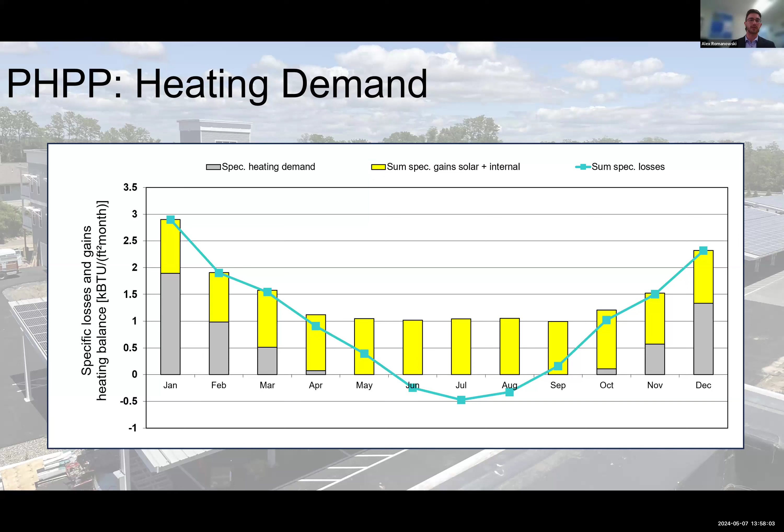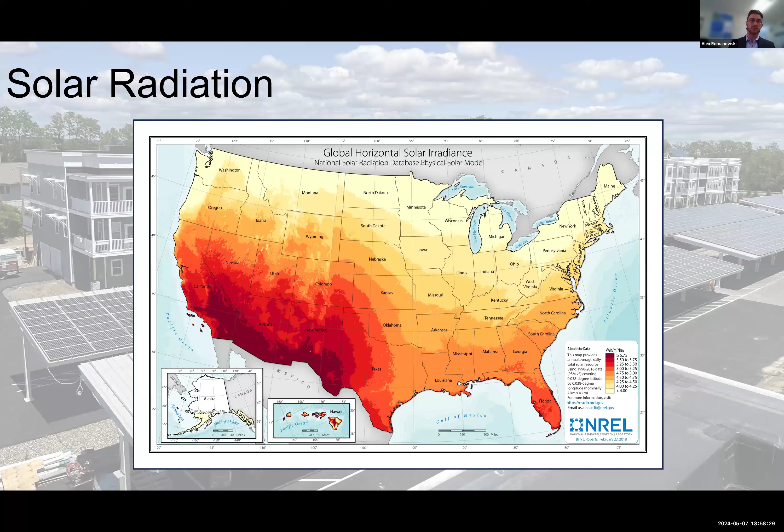I would also like to point out solar radiation. So the dark red means that your panels are going to be a lot more efficient. We've heard this all the time that California, Arizona, New Mexico, Nevada are great for solar, and the Northeast, not so much. So this will actually impact the economics of the deal and your efficiencies somewhat.

Now for the modeling results, we've got state, climate classification, how much energy the buildings are consuming a year, your solar efficiency. So for every kilowatt of power, how much energy are you generating over the course of that year? And then your solar size. I'd like to point out Maryland and Nevada. Nevada's got a lot more energy consumption than Maryland because it's a more demanding climate, yet its solar efficiency is significantly higher. So its solar system size is actually smaller than Maryland's. And along that same vein, Maine and Wyoming have similar energy consumptions, yet Wyoming's efficiency is better. So the system size is smaller.

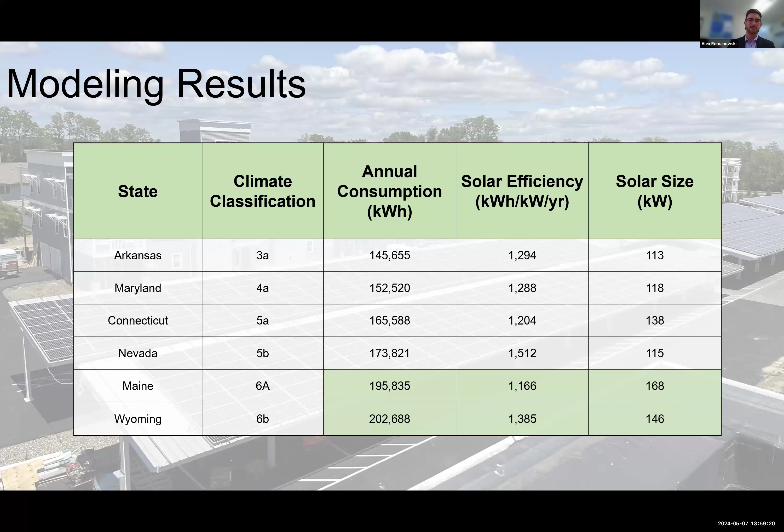All right. So we've got our annual energy consumption and our solar system size. It's time to see how much this actually costs to build and if any of it's going to pencil.

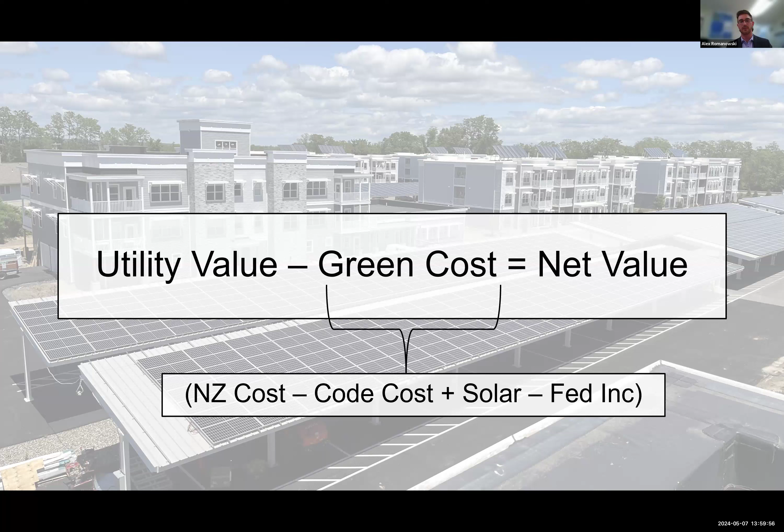This is one of the main equations that I used to drive what inputs I needed. You find the value of the utility less what it costs to build green, and that's going to give you your net value. Is it positive or is it negative? And that green cost is a function of your net zero building cost less the cost to build to code, plus your solar installations minus any federal incentives.

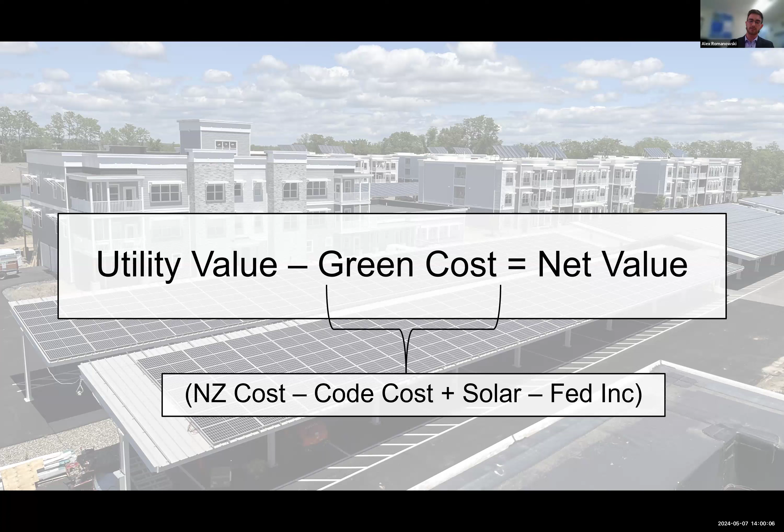Starting off with your net zero cost, I had two different sets of cost data, both from Solara. First is phase 1 and the second is phase 3. In last semester's presentation, I talked in great depth about the technical differences between the two, but we're just going to touch on those. Phase 1 was built to be net zero, but phase 3 was more ambitious with net zero and carbon sequestration in line.

So for phase 1, just 2x6 exterior walls and spray foam for the insulation. With phase 3, they wanted to sequester carbon within the walls. So they switched to cellulose insulation, need a bigger wall because its R value per inch is lower. And then they had to vent the attic on the flat roof to allow for blown cellulose instead of using foam. All of these were significantly expensive.

And when comparing to building costs in other states, building to code, it's not viable without incentives, which is a shame because obviously adding carbon sequestration into a project is going to be the best for the environment. But that's just not where we are today as far as financial viability.

Additionally, solar hot water is no longer financially viable. The incentives dried up and photovoltaics also got significantly less expensive. So it's now more cost effective to pair PV with an air to water heat pump and electric resistance hot water heater than also adding solar hot water on top of that.

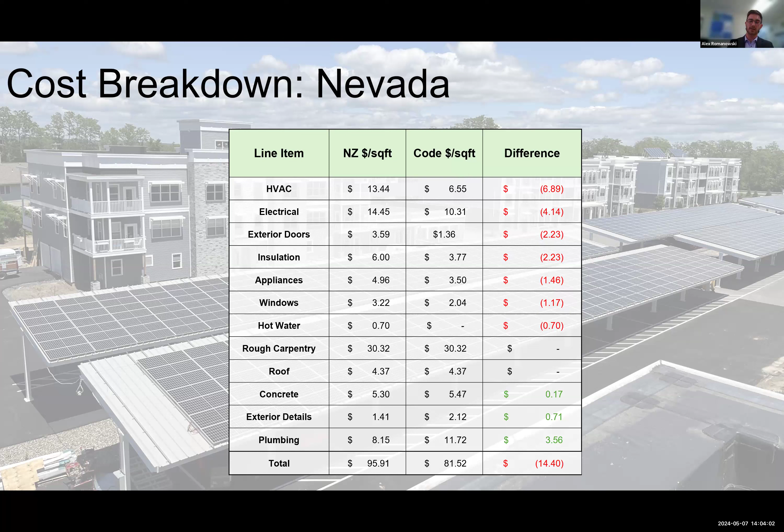Then the doors, insulation, appliances, windows, and hot water, you're basically building everything to be super high efficiency, so that usually costs more. Now, one interesting thing to note, all the way at the bottom is the plumbing saved money. Some of this could be regional, but on top of that, the engineers that designed the building practiced high efficiency plumbing. So just making all the lines more compact, and that saved money right off the bat. So your total cost difference is $14.40 per square foot.

Now, what incentives played into this project? I wanted to stay away from any sort of state incentives or utility incentives because those change really rapidly. But with the Inflation Reduction Act, we have a couple of incentives that are going to be here to stay for a while, and developers can rely on those. First of which is your photovoltaic investment tax credit. It's got a 30% system cost, along with a 10% adder if you buy products made in the United States.

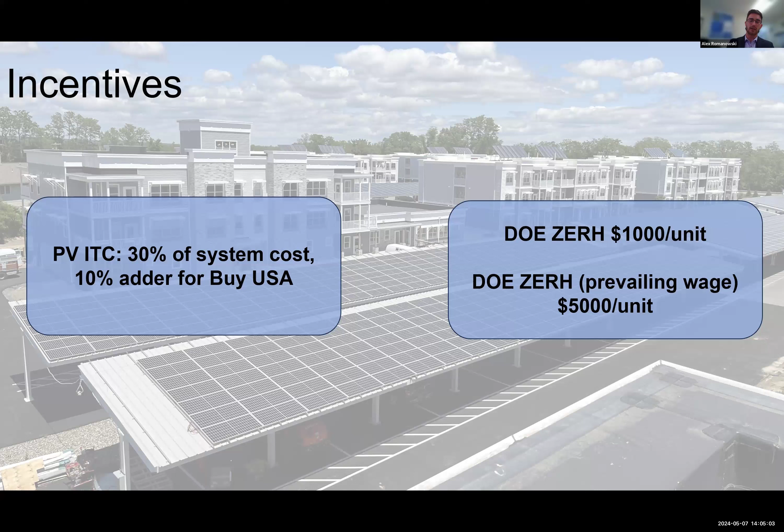And then there's the Department of Energy's Zero Energy Ready Home incentive, which is $1,000 a unit for multifamily, or $5,000 a unit if you build with prevailing wage. Personally, I'm not well versed enough in prevailing wage to be able to anticipate increased labor costs across different markets. So I just stuck with the $1,000 a unit and the 30% ITC.

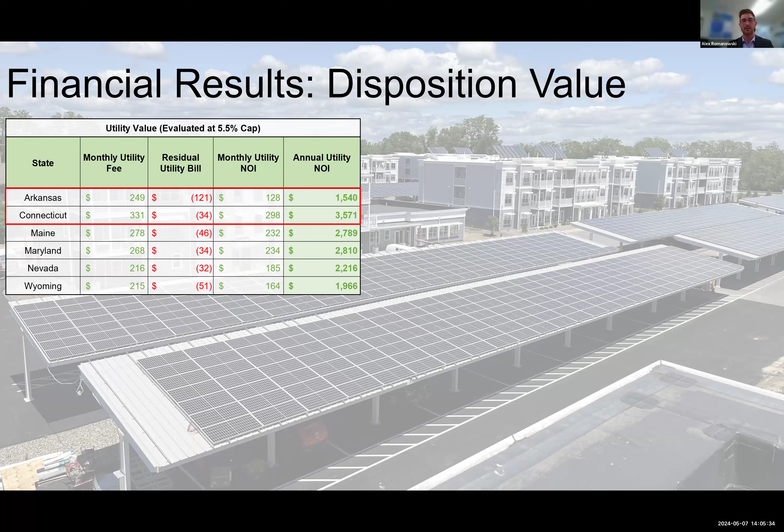Now, financial results to get the disposition value. Let's focus on Arkansas and Connecticut here. We've got our monthly utility fee and the residual utility bill. Because Arkansas is reconciled on a monthly basis for net metering, their residual utility bill is significantly higher. And you can see that your annual utility NOI is going to be way lower in Arkansas. Now, looking at the green costs, it's a lot cheaper per square foot to build down south net zero because the requirements are a lot less demanding as far as the climate.

And then all the way on the right, you've got your green cost per unit. Now, moving over to the equation I showed you earlier, you're going to take your annual utility income and evaluate that at a 5.5% cap rate, along with your green cost per unit, and that's going to give you your net disposition value. So for Connecticut, we can see that over the life of the project, it's worth $35,682. And then Maine and Maryland are also up there as far as some of the higher disposition values.

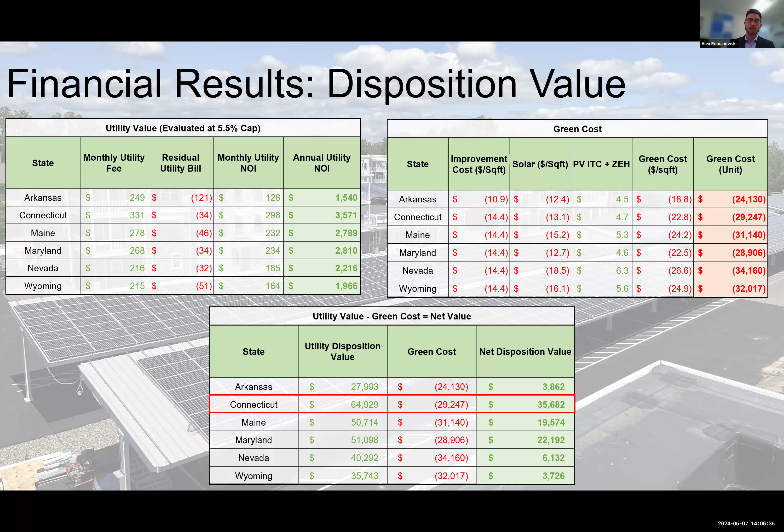Now, applying based on each climate zone, I took the residual utility bill of the individual state that I looked at, applied that to the climate zone, along with the cost per square foot, both on the building basis and the solar basis, because climate zones usually have similar radiation, as well as the annual energy consumption. And then I took all those factors and calculated the disposition value of building green for these states.

And then I didn't examine the West Coast much because they've got a whole lot of regulation around building, but it's likely viable given how many projects take place over there and how stringent their existing codes are.

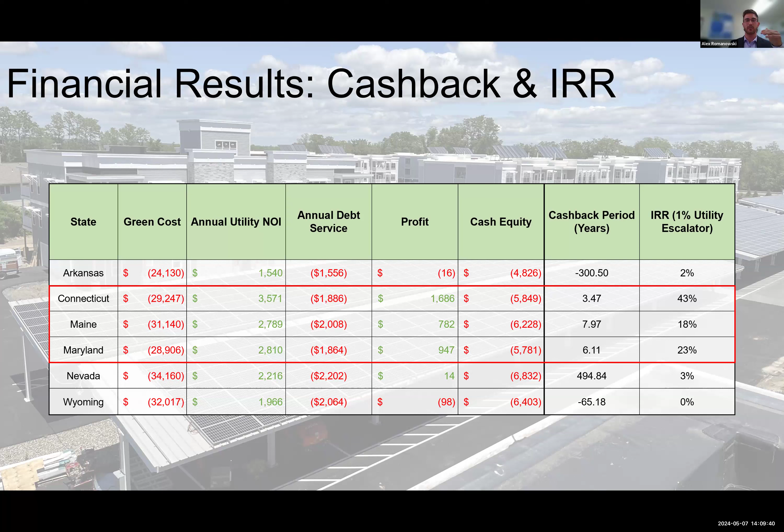And an IRR, I did scale all of the utility bills at 1%, which might be a little conservative, but your IRR for Connecticut is huge at 43%. And then Maine and Maryland are a little bit more standard as far as IRR is concerned, and the cashback period is longer. But it's super exciting to see that there are states outside of New York that not only have a positive and high net disposition value, but also realistic cashback and internal rate of return.

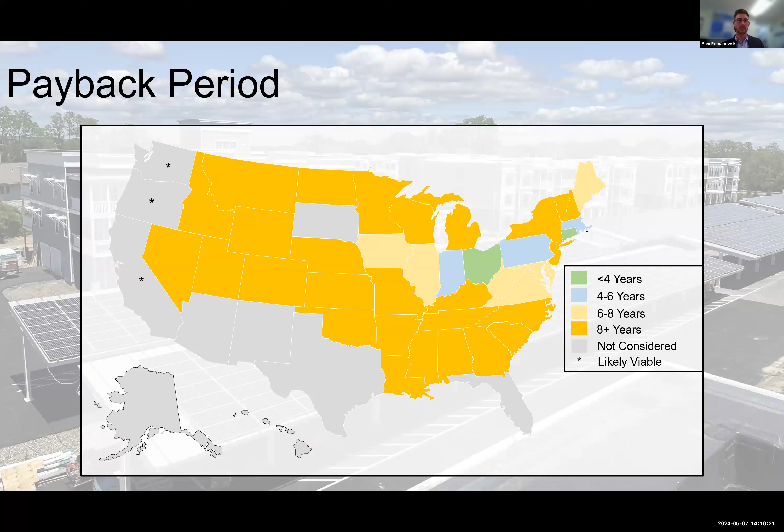Going again to another heat map of payback period, we can see that it's pretty much just the Northeast that is going to have a reasonable payback period, with green of less than 4 years, blue between 4 and 6, and that tan between 6 to 8. It's worth saying that some of the states that are in the 8+ year range are probably more viable. I think a lot of these estimates are conservative.

And now on to some additional considerations. First of which is time of use and demand reduction. Solar is engaged with their local utility on a demand reduction project, and they believe that they can get 20 to 30% of their peak demand reduced for 4 hours. Because all of these buildings have these awesome building management systems, they can interface with the grid very easily and take advantage of local utility incentives.

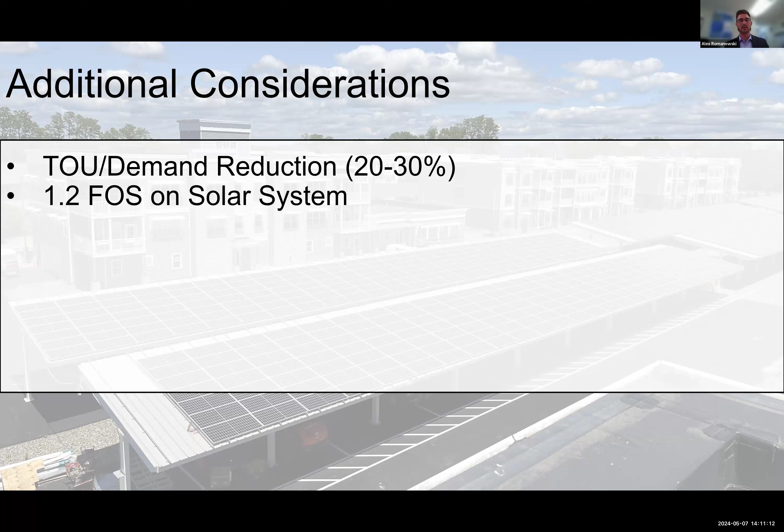I also put a factor of safety on the solar system size of 1.2. From what I can understand, Solar did a similar thing, and it worked out pretty well for them. It should just cover any inconsistencies in modeling. I did assume residential rates for the residual utility charge. With apartment complexes, you might be on time of use, but it is possible in a lot of states to chop up the individual apartments and the solar system to get on residential rates.

That just might cost a little bit more. The SRECs and any sort of state incentive, again, I left all of those out, and then along with utility incentives. So there's a lot of money to be had out there from incentives that I did not consider.

Another consideration is lower vacancy rate. These projects are relatively unique. They're cool. For the tenant, they can move in and feel good about themselves because they're living in a green project. And people get really excited about that. So these projects do tend to have lower vacancy rates, which will drive up your value.

One of the last things is market stability. Again, just with that product differentiation, you're going to see that these projects will probably hold up better in times of market instability. And then they're future-proof. They're, as I mentioned before, more resilient, but also the time of use and demand reduction capabilities are going to allow these buildings to respond a lot better as utilities start to shift more towards time of use infrastructures.